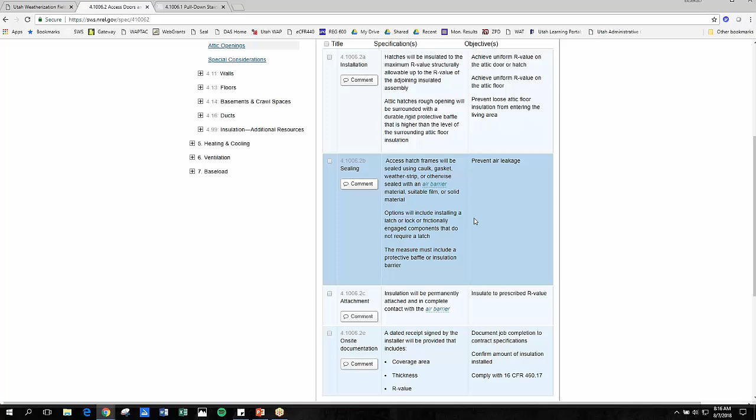Right now, basically everybody just uses the weight of the foam board to weigh down the attic hatch on the weather stripping. But you can use a lock or latch or something that will pull the attic hatch into the scuttle. So that's what the SWS has on this topic. And then the 3 bulletins that I want to go over that cover the attic access hatch are these 3 bottom ones right here.

And would anybody out there that's online be willing to read those, or is everybody muted, Matt? No, they can unmute themselves, so if we have a brave volunteer, that'd be cool. It'd just be these last 3 bullet points. All right, I'll just read them.

Install an attic access hatch if none is present, preferably at a large gable vent on the home's exterior. So if you have the choice and there's not already an attic access, try not to put it inside the home if at all possible, in a garage or in the gable end. And then an interior attic hatch should be at least 22 inches square if possible. Insulate the hatch with rigid board foam to the maximum practical R value. The roof's height above the hatch may limit the thickness of the insulation that you can attach to the back of the hatch door.

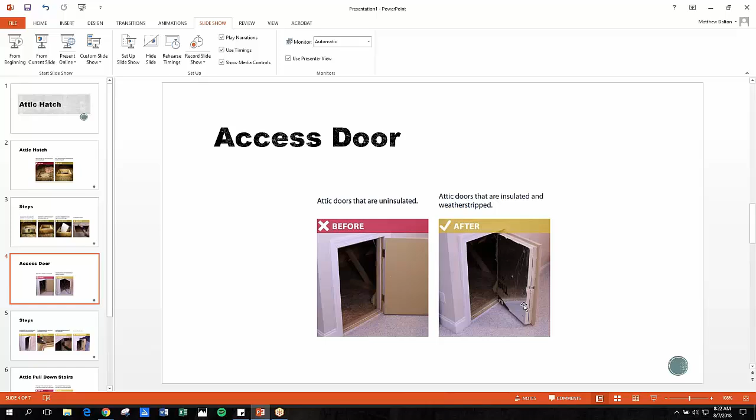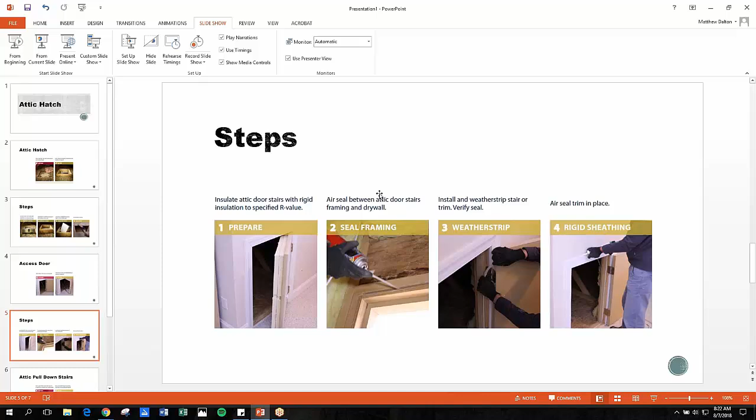And then here's a picture of an access door, a little better than what's in the field guide, but they've got their foam board attached to the access door. They're going to go around and put on the foam board, seal any cracks up, put the weather stripping on, seal around the casing. So other than that, does anybody have any questions on accesses?

That doesn't show all the wires and pipes and ductwork that's typically over the top of that. Yeah, there's a lot of times on those accesses, and that's why I see out in the field a lot of people using the OSB and stuff, because you can cut around, you can notch it out a little easier than the 2x10 or whatever. So, but yeah, it's not all real world, the pictures. You're correct, Scott.

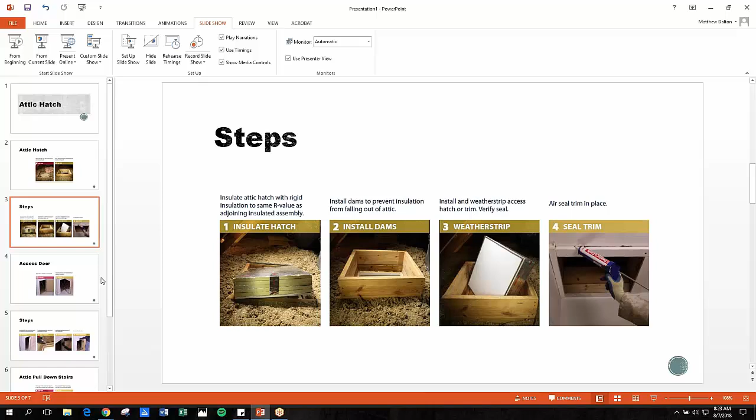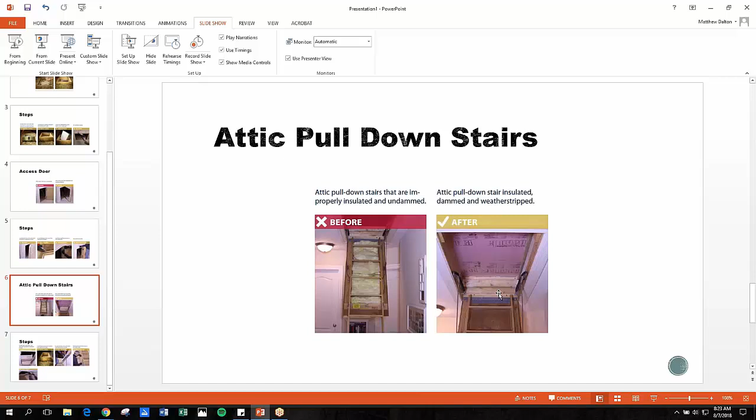And along with that, I did add some pictures here too for pull down stairs. It's the same, you have to have it totally sealed off. That is the objective, and to have the same R value across. And here they built the dam, and they got their layers of foam board to make sure they got the R value. They're going around and caulking all the different joints.

And you got to build that dam high enough so that your stairs can go up in and not push up your insulation that's on top of it. So you kind of make the seal along here instead of down lower. So that's all I have, Matt. All right. Unless there's some discussion on that anybody wants to talk about.

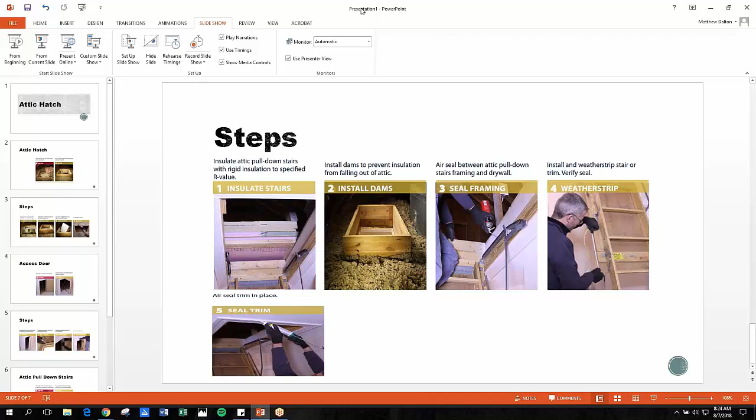I got a couple of things. Yeah, I figure we'll be back into this. One of the takeaways for me from this was that our field guide recommends that if we have to add the access, we add the access somewhere not on the thermal boundary if we can help it, because then we don't have to insulate it or air seal it. So if it could be in a garage, make sure and watch for that, because then it's just an access panel. But awesome.

Yep. All right, I'm going to take the reins back here. Okay. And all right, can everybody see the WAP guideline change form on my screen? Yes, sir. Yeah, I can see it.

All right. So Brad issued a Utah Weatherization Program notice about the first week of July, and it just listed out all of the changes that were made to the guidelines. It won't hurt to talk about them all really quickly, so I just wanted to go through them. I'm going to go through them in this change form because it shows you the reason for the change, the text of what we changed the guidelines to currently say, and then what the guidelines used to say, or in this case, since we submit this for review, it says proposed change and then current text.

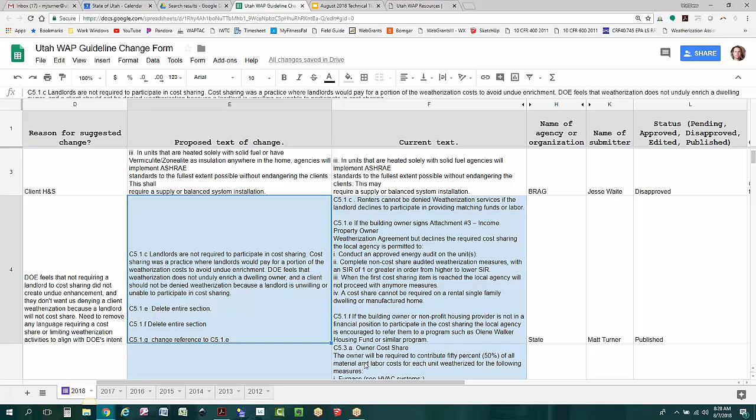So all of this stuff that used to outline how a landlord had to be charged and whatnot, all of that's gone now. The next line down is the same thing. We were just doing away with the language requiring the owner cost share. If you get in the guidelines and you still see something about that, feel free to let me know, because we may have missed something, but the intent of the guidelines is that owner cost share is no longer required.

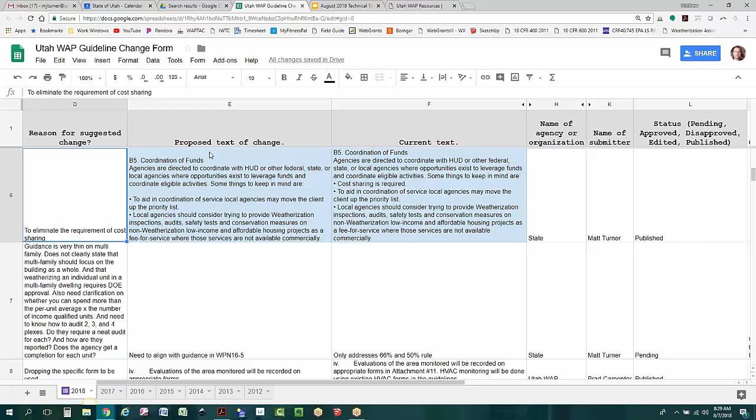Yeah, and that was all three of those lines there. There were some changes to section B5 as well. The other changes were, this one was really just, you won't really notice it, but the guidelines used to require that the SHPO documents were included in the intake file, and we moved the SHPO documents to be included in the audit file because the auditors are the ones that typically process that.

I added a provision, so this line 19, we added a provision to allow the auditors to not have to evaluate to add insulation to a wall when the wall cavity is less than 2 inches deep. So it simply says, since we do not have an effective method for insulating shallow cavities, if a wall cavity is uninsulated and less than 2 inches deep, an auditor can select none for the added insulation type, and note that there was no opportunity for improvement because the cavity was less than 2 inches deep.

So auditors, if you're evaluating a wall and the cavity is not deep enough, if you try to blow insulation in there, it's just going to get bunched up in the corner and we're going to have voids and stuff. There's really not an effective way to do it. I've now put it right in the guidelines so you have it in writing. It's okay to do exactly what it says there and to not evaluate to insulate that cavity.

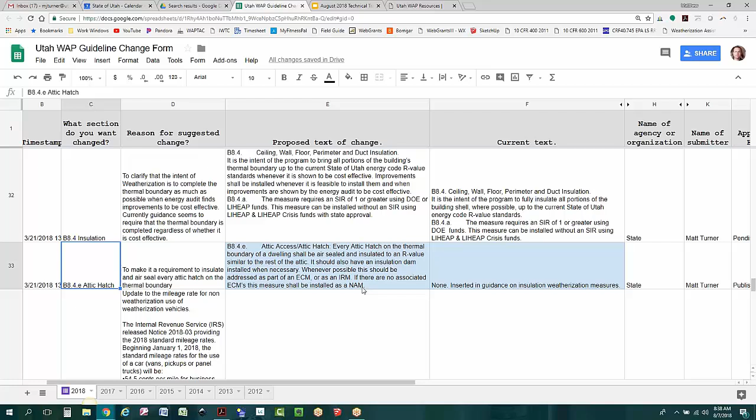But yeah, basically, most of the auditors have been addressing this, but as we come around, this is one of those where we won't even have to look at the audit. We'll just say, why didn't you address this attic access? It should have been done. So make sure that, especially auditors, that you're implementing that, but QCIs, be aware of it. If you're a field staff and you come across it and it's not on your work order, contact your auditor and talk to them about it.

So this one says we're going to clarify that the auditor should never use the added R value field in the attic section of the audit. We talked about this 2 meetings ago, I think, but basically the language before said something like should not use, and I had to go in and make the language a little stronger. It said should not enter anything into this added R value, and here it just says never use that added R value field.

What it is, if you're evaluating an attic to add insulation, there's a couple of optional fields, and one of them is added R value. If you use that optional field for added R value, you put your thumb on the scale. It actually forces the audit to do that measure. So if you say that you're going to do an added R value of 10, the audit thinks that now that's a required measure, and we don't ever want to do that because it will push it right into your list of recommended measures, and sometimes it'll have an SIR below 1, and so you'll accidentally install that measure and you really didn't have an SIR to justify doing it.

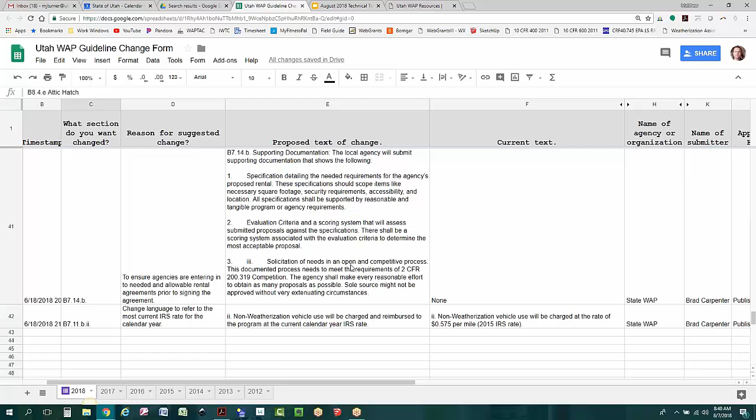So hopefully that's clear. Does anybody have any questions on that one? I feel like we've covered it a few times, but if we need to talk about it more, we can. Or do you have any questions on anything that I just ran through? All right.

Okay, so last month we did some guidance on foam plastics, and we got into the code. We read through some of the language of the code, and we learned that foam plastics basically have to be separated from the inside of the house by a thermal barrier. And then when it came to the ignition barrier, I didn't know enough about it, and I actually gave you guys bad guidance last month, which I'll hopefully clarify here. But we also left with a few unanswered questions. These are the questions that I left with from last month's training, and so I just wanted to go through them quickly and address them.

And then I also have a quick reference guide that I created that I'm going to share with everybody, and hopefully these two things will help us to better understand the foam plastic stuff. So basically, we have to separate all of our foam plastics from the interior of the house or from the livable areas of the house using drywall or 3/4 inch plywood or structural paneling. But when it comes to the attic, we were wondering, where does this ignition barrier come in?

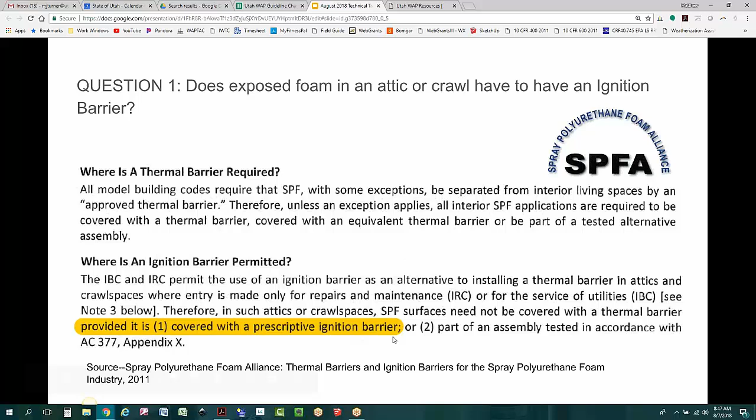So if it's not covered with the thermal barrier, it has to be covered with an ignition barrier, or it has to be shown to be tested to have met the fire testing standards. So basically, this is saying that, yes, we have to put an ignition barrier on all of the foam in an attic or a crawl space. So that was the Spray Foam Alliance that put that document together.

I could not find anything that was really prescriptive in the code that would answer the question, but I did find, so the code is, is it like International Code Council or something like that? So the folks that do the IBC and the IRC, the building code and the residential code, that is these guys, the ICC. And they have like a subsidiary that does these evaluation reports. So if you're a manufacturer, you have a product, and when you read the code, you have a bunch of questions about how the code would be applied to your product.

You could submit them to this group, the evaluation services group, and they will basically put in writing how the code should be applied. Now, these guys have no authority, but the simple fact that they do this for the purpose of the industry, these reports are generally viewed as how the code should be applied. You could have a building inspector that doesn't. That's not really how it works, Matt. Oh, if you want to enlighten us, that's as far as I read on it. That's what I learned about it.

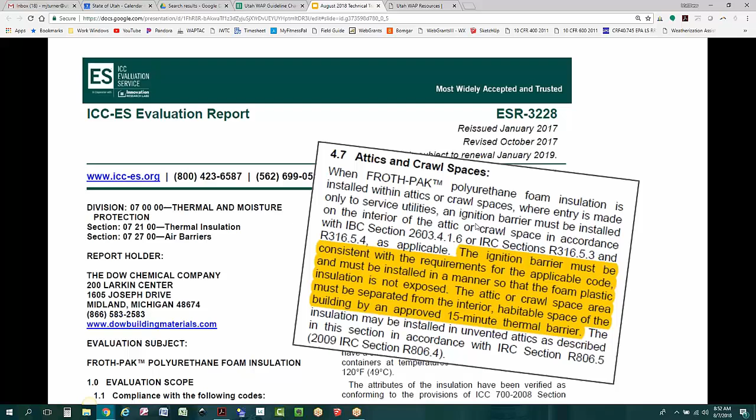So they're basically saying it has to be installed with the ignition barrier to keep it from being exposed. And that language or something similar was in every one of these ES evaluation reports. So basically, to answer the question about whether or not we can put foam in the attics and crawl spaces, as a general rule, it has to have an ignition barrier.

I'll show you in the chart. There's a few products that have been tested and shown that it's okay to install them without a thermal barrier. But as you can see from this drawing, here's the interior of a home, and the red line represents the thermal barrier. But when we're up in an attic that's not used for storage, just access to service utilities or mechanical equipment, then you do have to have an approved ignition barrier covering it on all exposed sides.

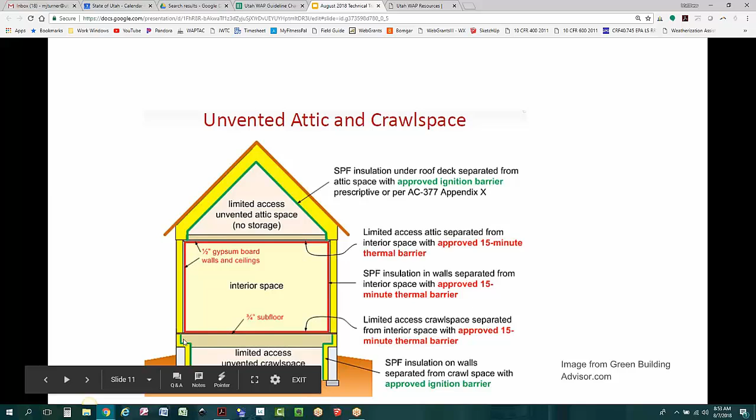And same thing going on in the crawl. That green line is going to represent that. So the answer to question number 1 is yes, exposed foam in attic or crawl must have an ignition barrier or have specific approval. Question number 2, is fiberglass insulation an allowable ignition barrier?

Last time we read through these 2 sections from the 2015 residential building code, and I did confirm yesterday that is the current adopted code in Utah. As you can see, it has this list of ignition barriers, which was 3.1 through 6 for crawl spaces and 3.1 through 8 for attics. So for attics, they added cellulose and fiber cement paneling, but it's not listed for crawl spaces.

But we had a question, and I can't remember if it came up in the training or afterward, but 3.1 says 1.5 inches thick of mineral fiber insulation. But nowhere in this list does it list fiberglass. And I actually reached out to Owens Corning, and one of their technical reps gave me a little bit of guidance because they were under the impression that mineral fiber insulation includes fiberglass.

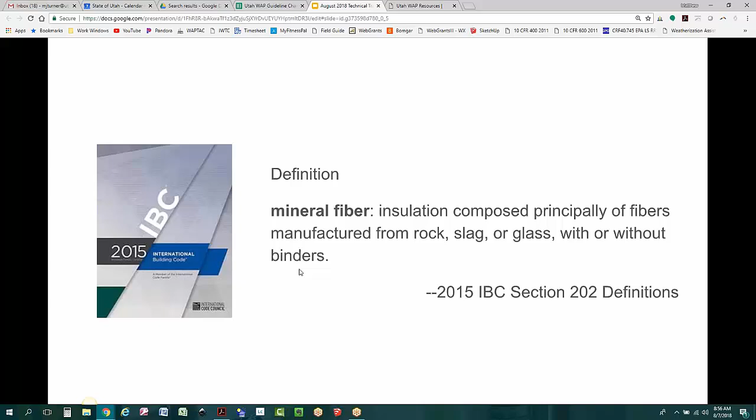Okay. Well, here's the definition in the International Building Code of this term mineral fiber: insulation composed principally of fibers manufactured from rock, slag, or glass with or without binders. But this stuff is extremely dense. It's not like glass that's got all that air in it. If you bring it up, you'll see. No, I understand, and I know what rock wool is. What we got hung up on was, what does this term mineral fiber insulation mean? Does that include fiberglass?

No, it does not. All right. As you can tell, from what I found, I feel the opposite of what Brad is saying. So it's still an issue that you may run into with building inspectors and stuff. So, yeah, I'm not sure how to move forward on that one, because basically what it comes down to is these are our options for ignition barriers.

So in an attic, if we're going to put some foam plastics in the attic, then once we're done, we have to cover it with something. And in this case, they're saying it has to be mineral fiber insulation, a wood structural panel, particle board, hardboard, gypsum board, or steel in a crawl space. Or in an attic, they've added cellulose and fiber cement paneling.

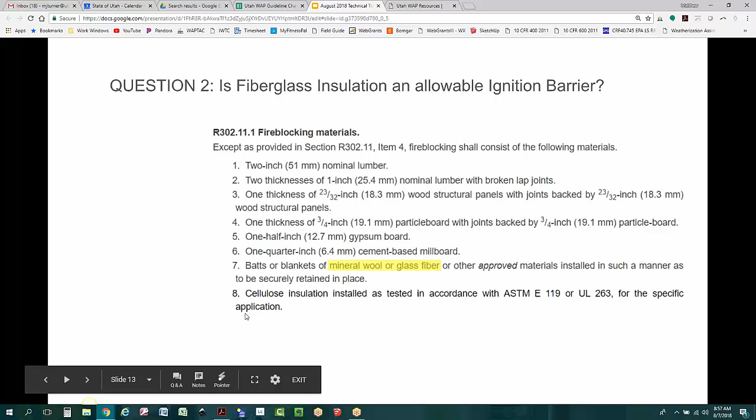So the conclusion that I had come to was that yes, fiberglass would be an allowable ignition barrier, but the program manager is saying no, and we'll go with that. So back to the pictures of this. So here's an attic and here's a crawl space. What would we need to do if we ran across these situations in the field?

In the video last month, we talked about this crawl space, and I basically said, is this allowable without an ignition barrier? So from what we talked about today, is that allowable without an ignition barrier? No, it is not. No, no, no, and no. And so what could we put on that as an ignition barrier? Whatever's on that list on your previous slide. Yeah.

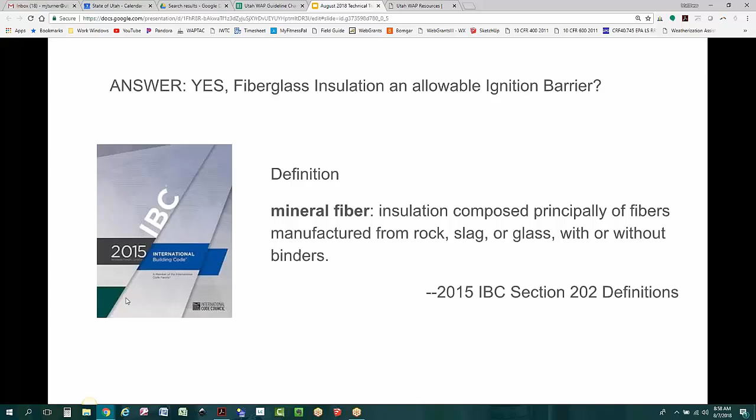That being the case, though, so if this was a crawl space, what would you guys use if you had to put an ignition barrier on that? I think the problem's going to be here is suddenly now you have to do two things instead of one thing. So why even put foam if you have to go through and re-insulate the foam that you just sprayed on the wall? So just use insulation in the first place. Well put.

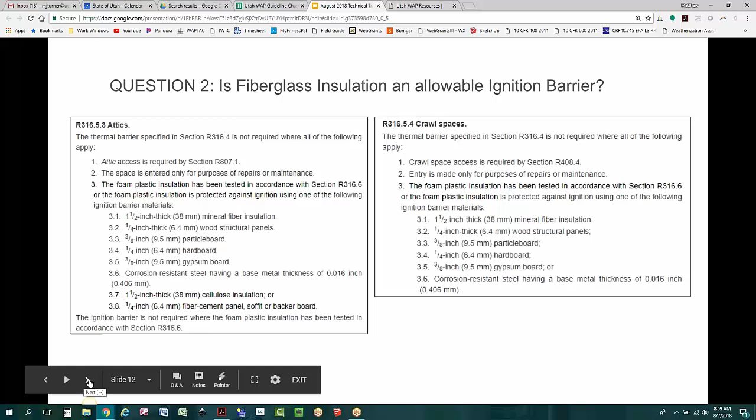Yeah, that's kind of the conclusion I came to as well, is that it can't be used the way that we've seen it used in some areas. And in this case, as I'm looking at this, this thing has a window and it's rather large, so this would probably be construed as not an attic, but more of a part of the living space, and you'd actually have to put drywall or 3/4 inch board on that attic.

But same thing there, if this was an actual attic and the window wasn't there, then you'd have to pick something from that list. And just as Scott said, if we're doing insulation stuff, maybe we wouldn't opt for any foam plastics as part of an insulation measure. So do these examples need an ignition barrier? Answer is yes.

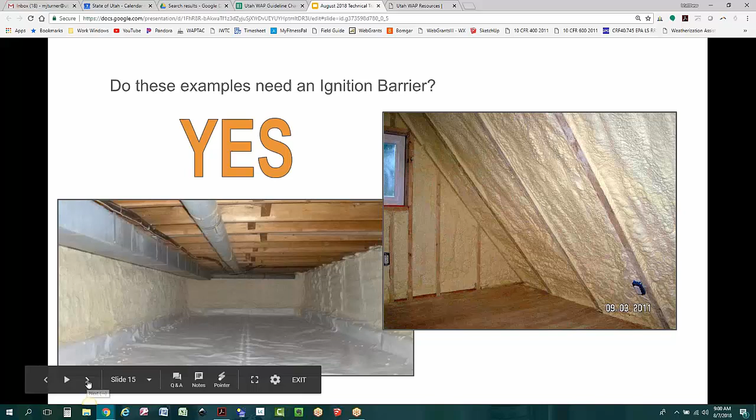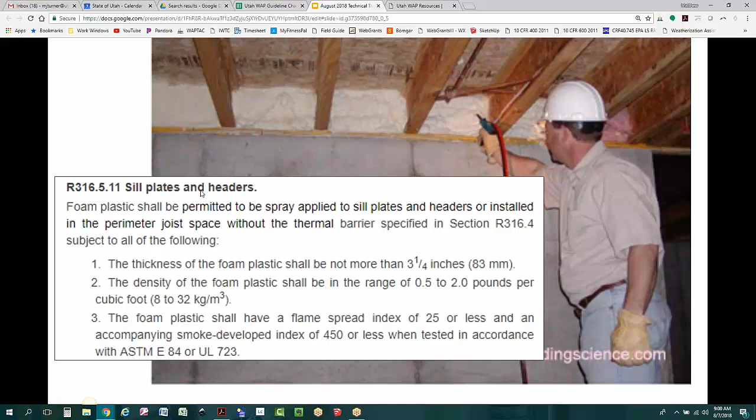The sill plates and headers, there was one issue on this that is also questionable. So the code says that foam plastic shall be permitted to be spray applied to sill plates and headers or installed in the perimeter joist space without the thermal barrier specified in section 316.4, subject to all the following. And it says the thickness of the foam plastic shall not be more than 3 1/4 inches thick.

So again, this is all about fire, so if you have too much of this flammable stuff up there, it becomes a fire hazard. So they're limiting the thickness of it. It says the density of the foam plastic shall be in a range of 0.5 to 2 pounds per cubic foot. The foam plastic shall have a flame spread of 25 or less and a smoke development index of 450 or less. So the question here was, do you know what the flame spread is for the products that you guys are using, and is it below the 25 and the smoke index below 450? And then also, you got to make sure you're under the 3 1/4 inches.

But the plot thickens a little bit when you get into the fire testing on this stuff, because a lot of these products were not tested at 3 inches thick. Most of them were only tested at 1 or 2 inches thick. And they did get that flame spread index.

You know, they get the score below 25 and 450. But because they weren't tested at the actual thickness, you may run into some issues if you're applying it thicker than what it was tested at. So something to be aware of there, which kind of goes back to what Scott just mentioned. Like, if you're installing this as insulation and then you have to cover it with other stuff, what was the point of doing it?

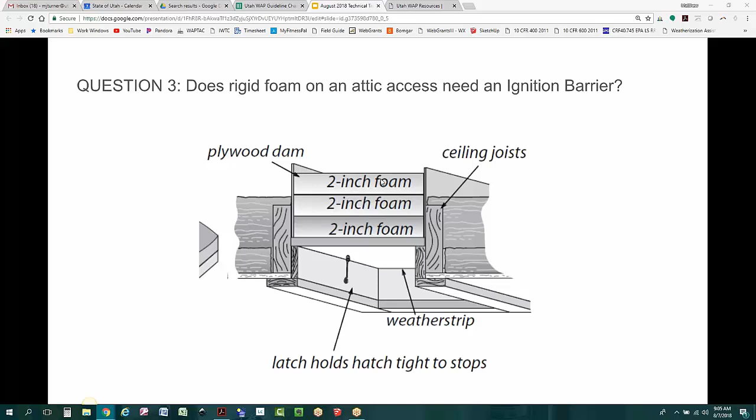So Dalton just showed a couple pictures of the knee wall attic accesses where they're gluing rigid foam on the back of those doors. That assembly might be a little more problematic because if you glue drywall to the back side of it, you may still have exposure on the sides of that. And I don't have great answers for that stuff right now. But yes, rigid foam on an attic access, if it's exposed foam in an attic, it has to have an ignition barrier.

Does 2-part foam on ductwork need an ignition barrier? Yes. So if this stuff's in an attic, what could we use for an ignition barrier? Well, again, this is where you're going to run into an issue because we've been doing this forever, and it even says it in the weatherization guide. But if we have to wrap that in fiberglass insulation, then there's just no sense in even spray foaming it anymore.

If this ductwork was going to be covered in cellulose, one of the allowable ignition barriers is 1.5 inches of cellulose. So if you knew that it was going to be covered in that, then you'd be okay. But again, if it's going to be covered in cellulose, why are you spray foaming it, as far as insulation? Now, could you use some spray foam to air seal ducts? Yeah, but it's not as good as mastic.

Yeah, and the manufacturers actually have limitations. You can only go like 3 inches wide, and you can make a strip as long as you want, or you can make a strip that's 6 inches wide, but it's limited to like 18 square inches per foot or yard or something like that. So you can use it as an air sealing material, but if you're covering entire surfaces, it has to have an ignition barrier. And so I don't see a way around this one either. As far as I can see, we probably shouldn't be using spray foam to insulate our ducts.

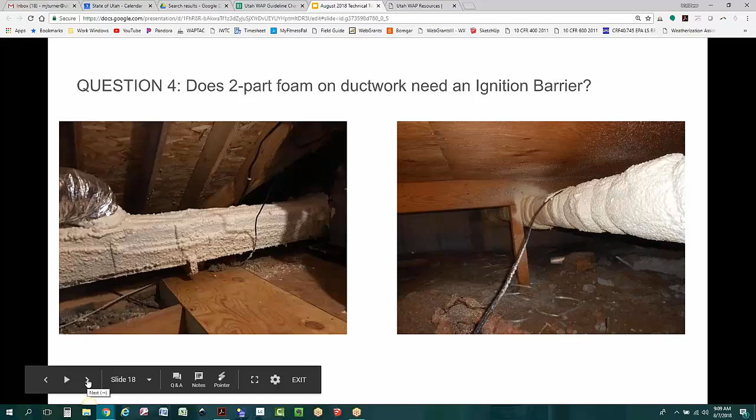Which products don't need an ignition barrier? I don't know if you guys can see this very well on your screen, but I'm going to email this out with the link to the video. I basically went through and grabbed most of the products that we're using in our program right now. So I looked at some foam boards, the 2-part foam, and some 1-part foam. And I looked at what they were tested at, and basically how we can or cannot use them in our program.

This first section is like, can we use Owens Corning as attic insulation? And you can see that you can go up to 3 inches without an ignition barrier. They have passed all the fire tests, and they have submitted to the ICC and shown that their product meets the standards, and you can go 3 inches thick without an ignition barrier. The Dow Styrofoam, you can only go 2 inches. The Dow Thermax, you can go 4 1/4 without an ignition barrier.

But the problem with this is it's a polyiso, which, if I'm not mistaken, can be more flammable than this XPS stuff. But they've got foil facers on it, so it passed the fire tests. But if the edges of this are exposed, then those have to be covered with a thermal barrier. So even this product is not the magic answer to some of the problems. I haven't actually seen anybody using this, but as I was researching, I found this was one that you could go a little thicker. And then the Dow Tuff-R, you can go 1 inch.

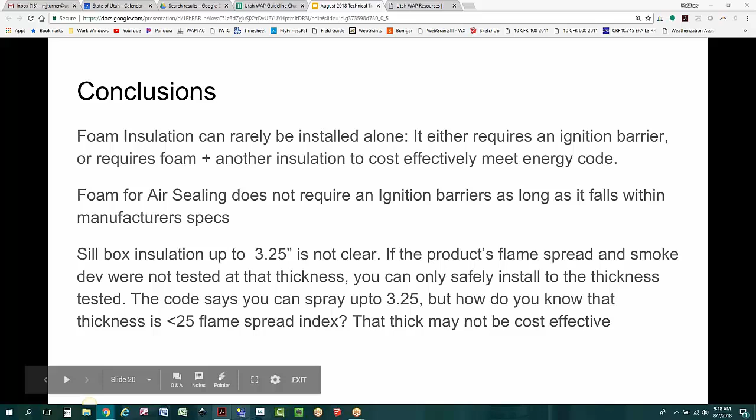Are not for situations involving residential and not involving situations where the foam plastic is being used as insulation. It's where it's being used in exterior stucco applications and things like that. That's commercial.